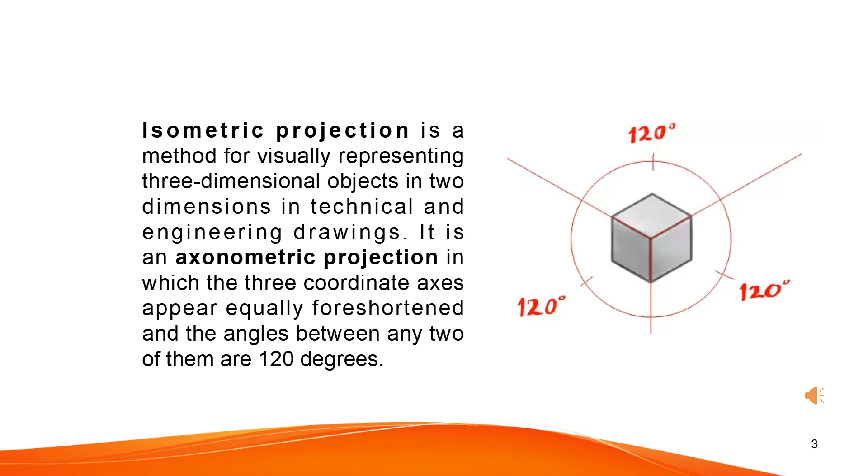Isometric projection is a method for visually representing three-dimensional objects in two dimensions in technical and engineering drawings. It is an axonometric projection in which the three coordinate axes appear equally foreshortened and the angles between any two of them are 120 degrees.

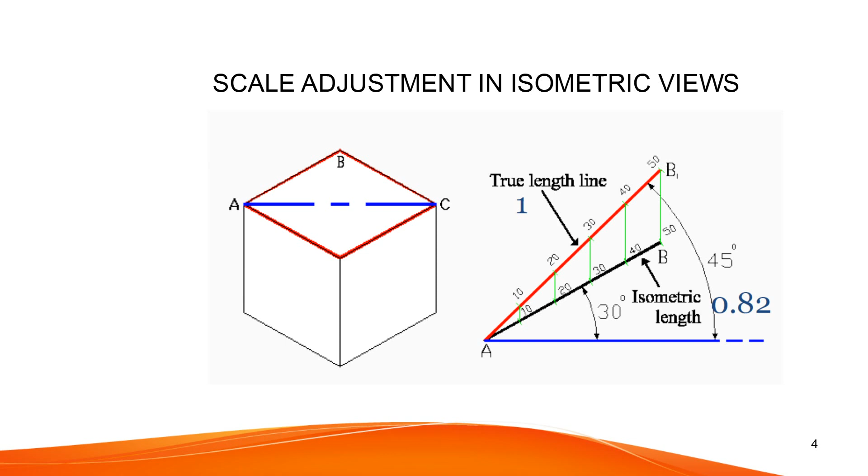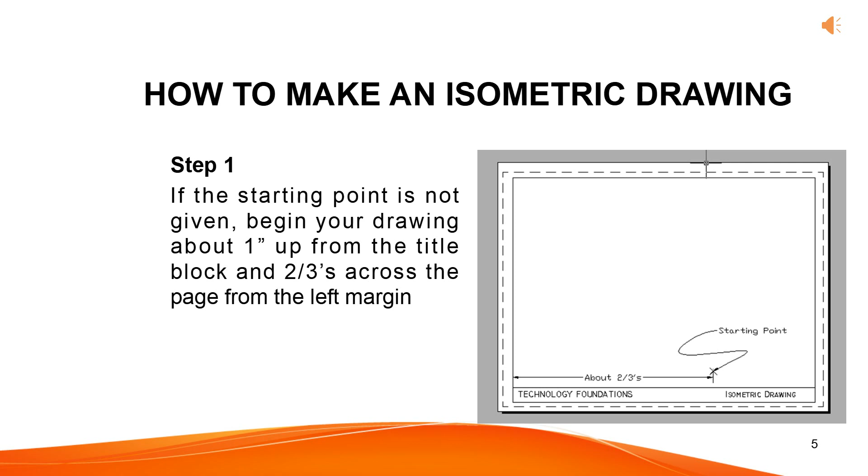Step 2. From the starting point, draw lines 30 degrees to the left, 30 degrees to the right, and 90 degrees up with light construction lines.

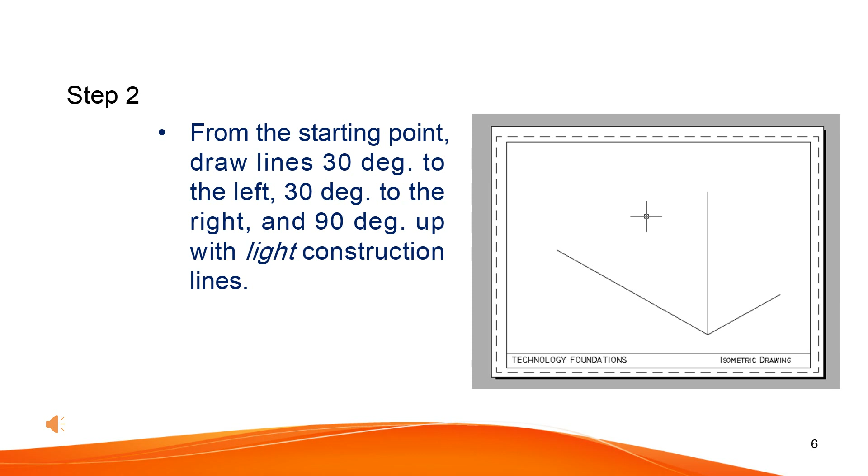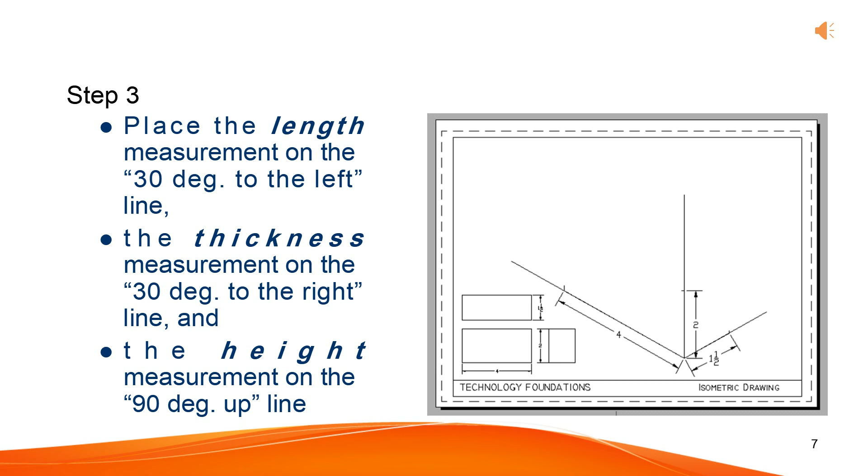Step 3. Place the length measurement on the 30 degrees to the left line, the thickness measurement on the 30 degrees to the right line, and the height measurement on the 90 degrees up line. Step 4. Erase excess lines back to each mark.

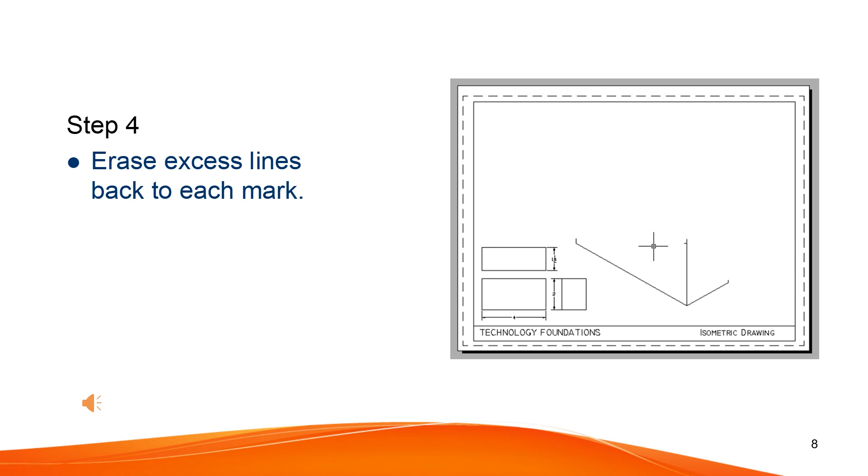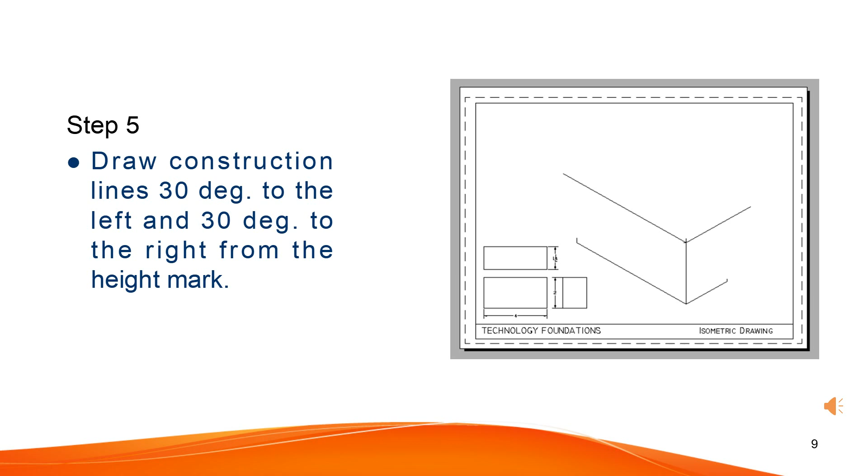Step 5. Draw construction lines 30 degrees to the left and 30 degrees to the right from the height mark. Step 6. Draw lines 90 degrees up from both ends.

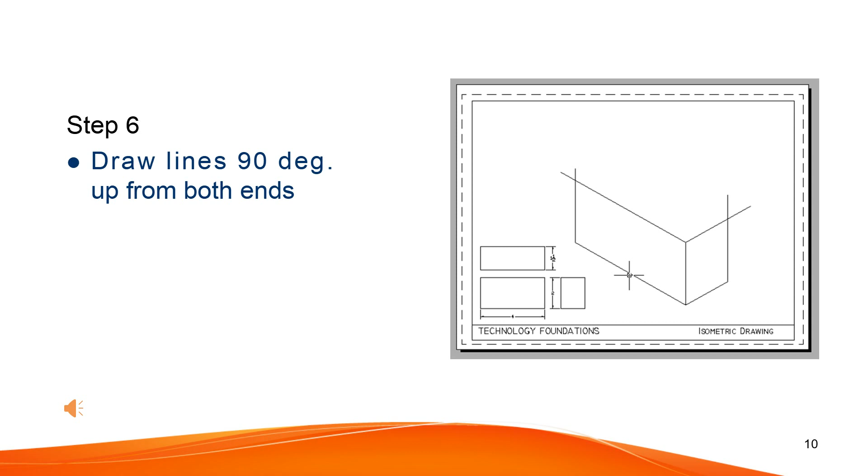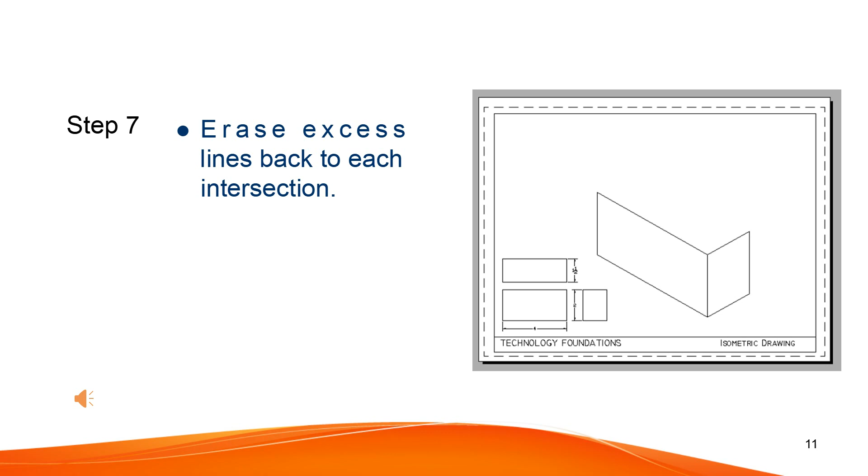Step 7. Erase excess lines back to each intersection. Step 8. Draw construction lines 30 degrees to the left and 30 degrees to the right from each end until they intersect. Convert all construction lines to visible lines.

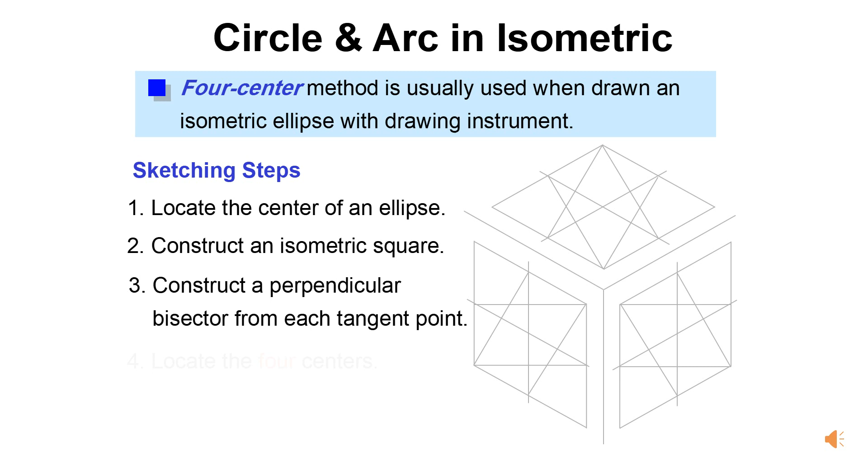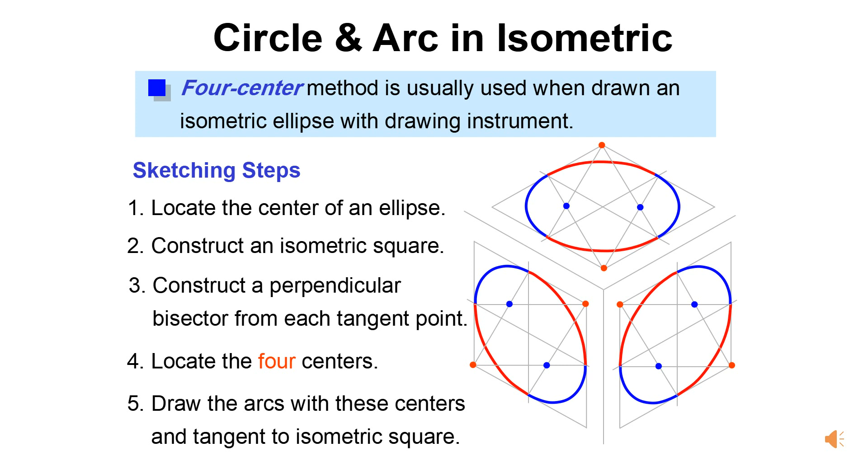Circle and arc in isometric. The 4-center method is usually used when drawing an isometric ellipse with drawing instruments. 1. Locate the center of an ellipse. 2. Construct an isometric square. 3. Construct a perpendicular bisector from each tangent point. 4. Locate the 4 centers. 5. Draw the arcs with these centers and tangent to the isometric square.

How to draw an ellipse composed of 4 arcs using a compass. 1. Trace an isometric square. 2. Find the center of the square using diagonals, then trace the axis lines. 3. Finally, trace the median lines. The meeting point of the medians shows the center of the 4 arcs of the circle.

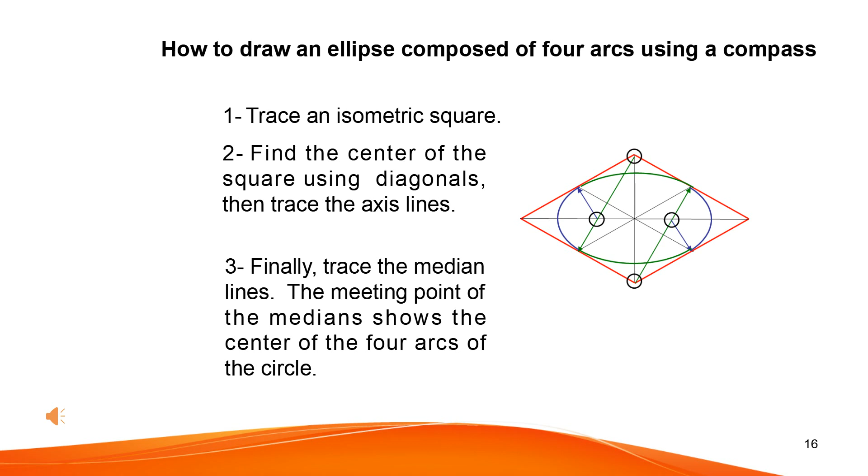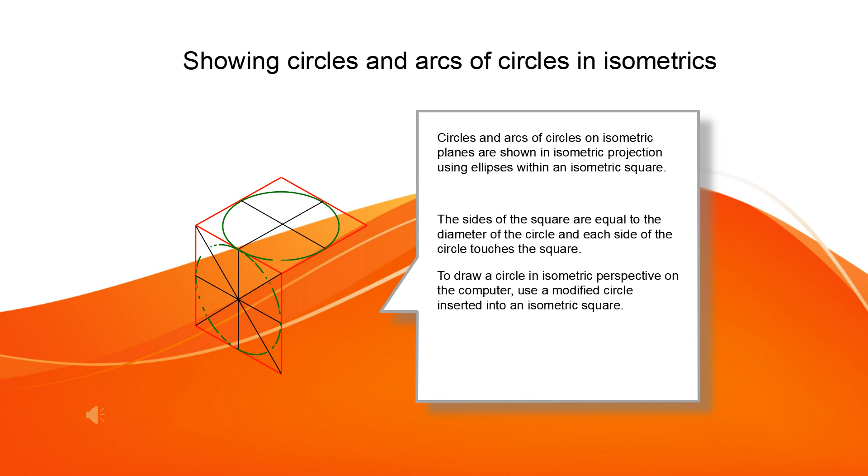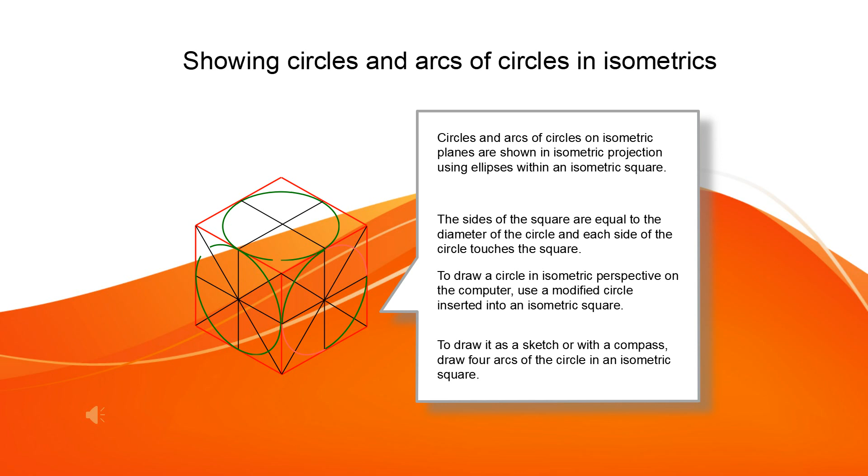Showing circles and arcs of circles in isometrics. Circles and arcs of circles on isometric planes are shown in isometric projection using ellipses within an isometric square. The sides of the square are equal to the diameter of the circle and each side of the circle touches the square. To draw a circle in isometric perspective on the computer, use a modified circle inserted into an isometric square. To draw it as a sketch or with a compass, draw 4 arcs of the circle in an isometric square.